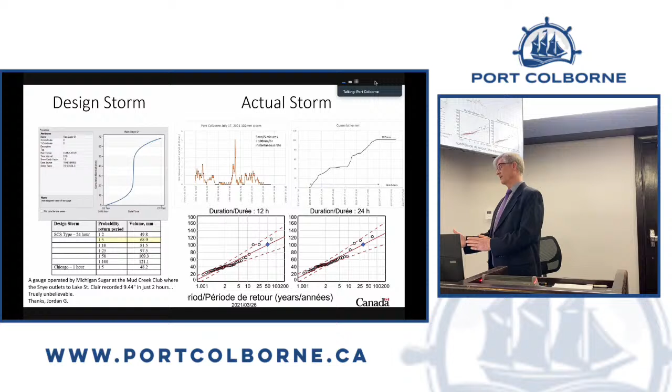The blue diamond on the bottom chart - these two charts help us compare the statistics of past rain events to this rain event. It's somewhere between a 25-year storm and a 50-year storm, just to give some context. The total amount of rain delivered was just over 102 millimeters in about 16 hours.

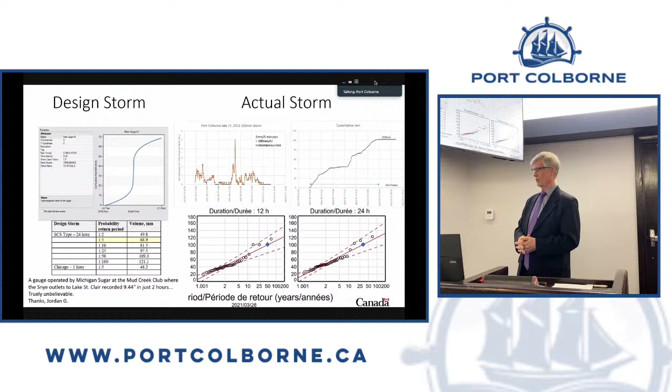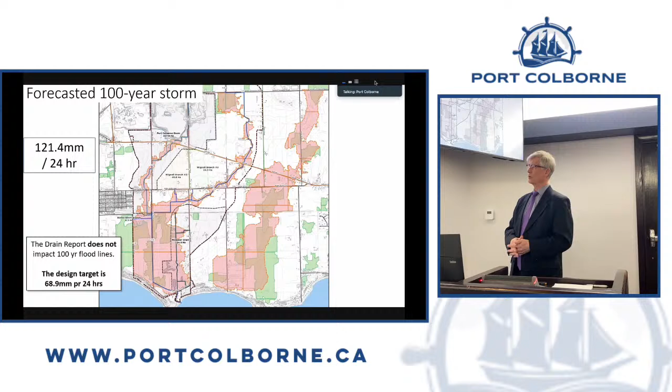But all the rest of those lines at the bottom, my report doesn't change or affect those lines. That stays with the Niagara Peninsula Conservation Authority.

As part of this, there was previous work constructed under Section 124 of the emergency part of the Drainage Act, where as a response to something bad happening in the drain, the city can go in and do works on an emergency basis. That's what was done here: 157 meters of construction using concrete blocks to form a hard embankment on the south side of the Wignell Drain at Snider Road, the south part of Snider Road.

It was requested by the property owner at the abbreviated roll number of 403-800, which is - I'm going to point there - in the middle of that diagram. Thank you, Alana.

However, it was built on somebody else's property, the property to the north, so there's a bit of a conflict there. It's also built on the Snider Road right-of-way, 26.4 meters of it. The challenge is this is past work that was done, but in this report, it's to be billed out to those that are affected.

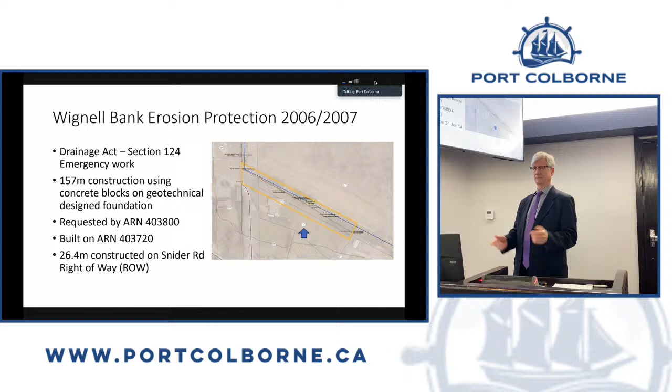Can you go one more? Yeah, there. And one more. Those are the two properties, and one more.

There was a significant amount of effort because everybody knows it's in the bog, so the ground is not very good ground. There was a study by a geotechnical engineering firm on how to create a base that these blocks are constructed on, so there was a significant amount of cost in the construction of this work. As part of this report, that's to be billed out to those affected.

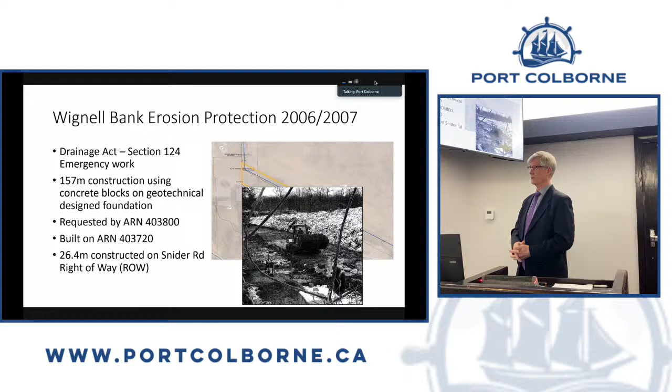Next please. The other work that was done was at the outlet of the Wignell Drain. The land changed owners, and the new owner asked that the access for maintenance at the mouth of the drain be changed. So that was done, and as part of that, it was recognized that under the Drainage Act, we should have a reserve for any right of access to the drain across someone's property. So there is a payment as an allowance for that reserve, and there's a construction cost for the gravel to create the laneway to the very end.

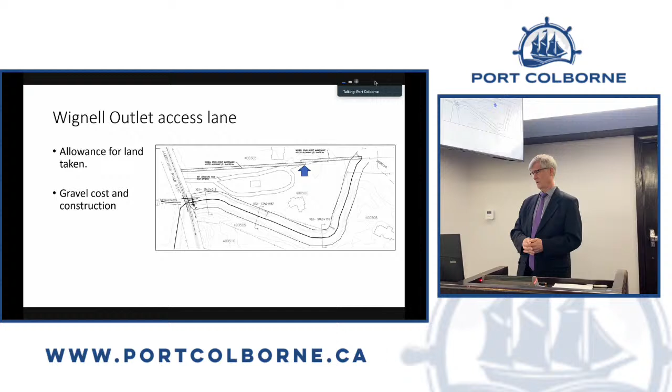So the petition for requests, as Alana's already stated, anyone can make a petition request under the part of the Drainage Act. In this case, we have 3 requests, all from the city, by the road authority to have sufficient outlet. I'll go through and describe those.

So the first one is the Bower drain. The previous drainage superintendent believed it's already a drain, but we couldn't find any evidence that said it was a drain exactly. So we went through this process, which makes it a drain. It makes it a branch drain of the Wignell watershed, called the Bower drain, which is what he thought it was called in the first place, so we're sticking with the same name. This exists; we're really doing this as an exercise so that the city can perform maintenance on it at any point in the future, and it ensures that the road outlet at that corner has a place for the water to cross an outlet.

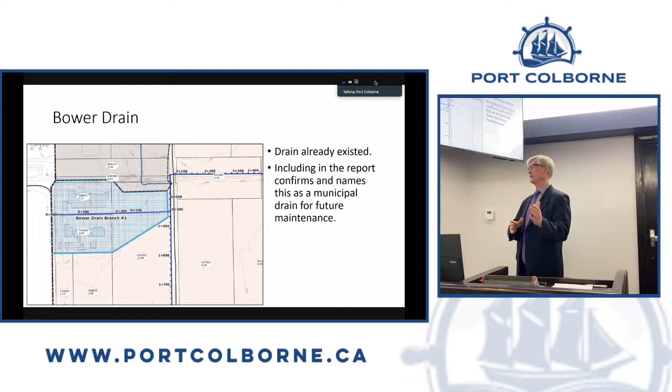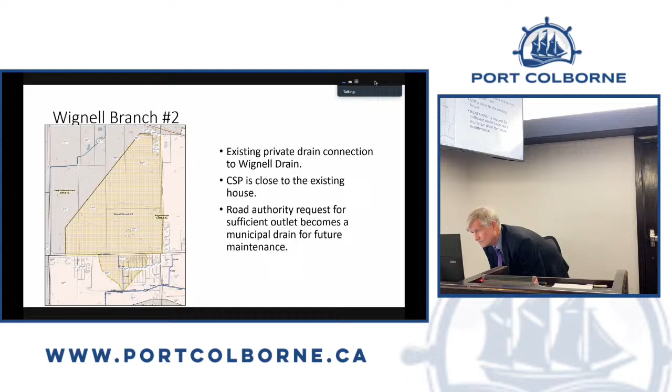The second one we're calling the Wignell branch number 2, which is not as good a name as the Bower drain, but it's what we have. It's again on the basis of the city signing a petition for sufficient outlet. The drain is just the little part that's at the very end connecting to the Wignell drain, but it drains a significant part of the watershed all the way west of Lorraine Road.

Part of this is there's an existing corrugated steel pipe that's very close to the house, and this routes a future path for the drain to go around that property and still provide access for runoff from the roadway. It satisfies the road authority request for sufficient outlet. It's really an investment in the future needs of the roadway requiring drainage.

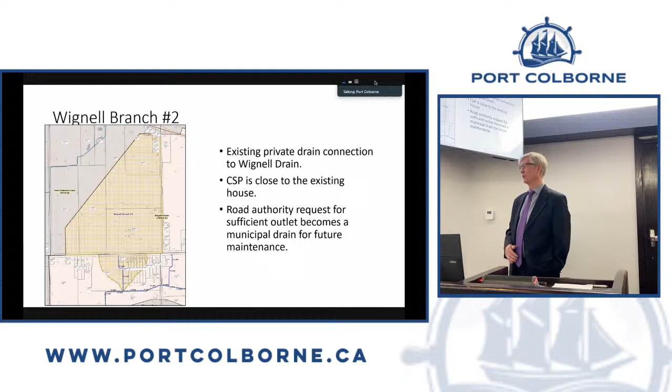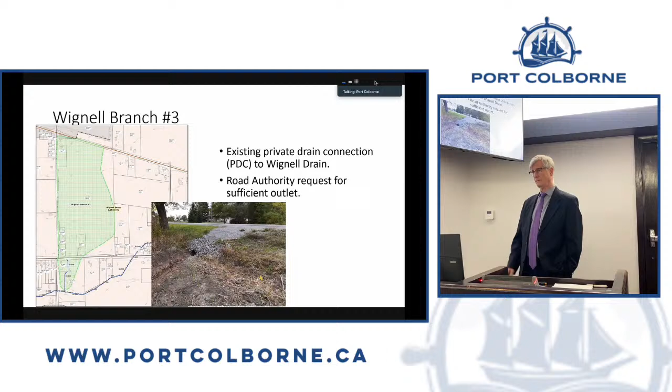The rest of the report, the next part is under section 4, maintenance. A lot of times maintenance will be done in the future and billed out according to the maintenance schedule, but as part of my report, we're doing maintenance on the drain, and that work will be billed out as part of this report. Next, please.

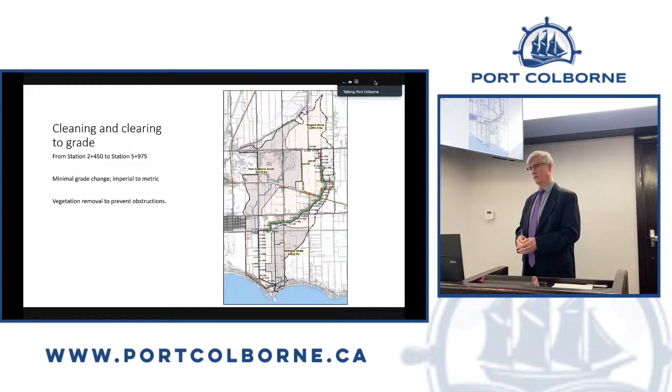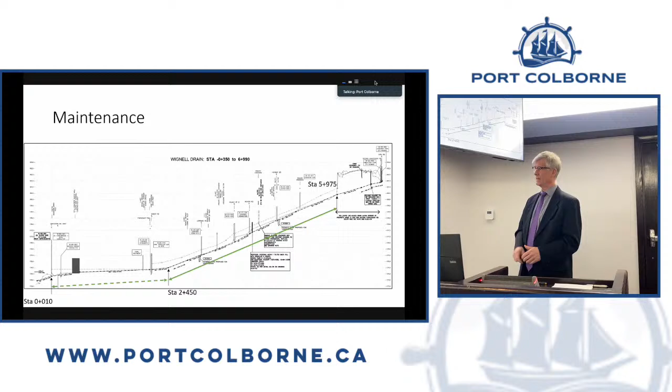The bottom part there in the dotted line, we're just doing spot maintenance. Wherever there's an identified problem, Alana will go in and fix that problem, but we're not prescribing a complete cleaning of the drain. It's spot maintenance only, so we've set a budget for that, but it's spot maintenance.

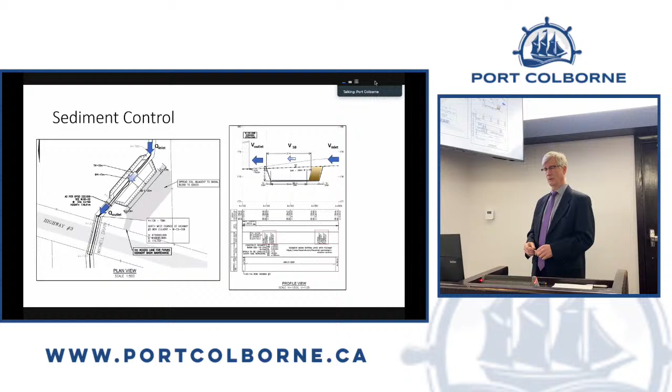The next parts are Section 78 improvements under the Drainage Act. They are things we're proposing to make it work better.

All of the costs for this are assigned to the quarry. Alana and I participated in the quarry's application for development, and we had some influence on the plans so that we have maintenance access there that's on the quarry, not on the neighbors. It's really the quarry that's carrying the bucket for these changes, and it ensures that all the farms to the north still maintain their sufficient outlet through the drain.

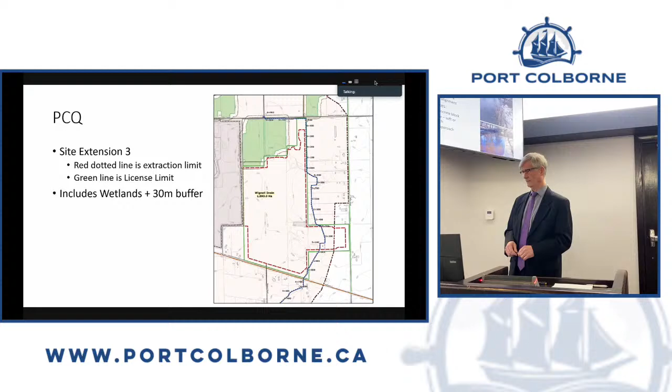The other part we're calling the Bank Restoration Improvement Program, and this is an alternative to the concrete blocks. We can continue to construct concrete blocks, but in engineering terms we're trying to do things in a more natural way, imitating nature instead of just replacing with concrete blocks. That's what this is, bank restoration using natural materials, supposed to be a softer approach than the concrete blocks. It recognizes that there will be flooding in this area, exceeding the banks, and that's part of the natural cycle.

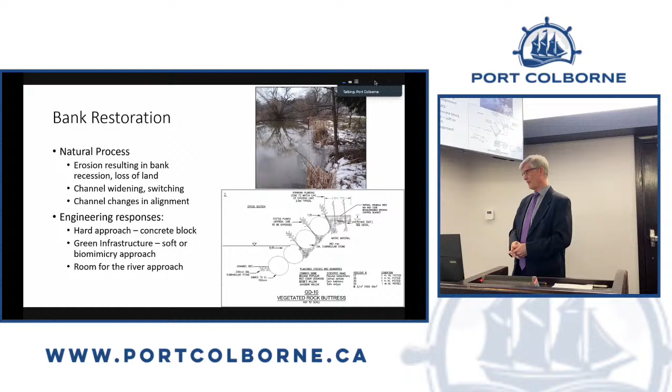It's a softer approach using vegetation. This is an example from Huron County from last summer. It's hard to see, but if you point to the little sprigs in front, this is called live stakes. Instead of putting a potted shrub in place, these stakes are cut, they get root growth on them, and you take a metal rod, make a hole in the ground, stick the stake in there, and step on it. Some of them take, and as you can see here, some of them don't. It's a planting approach.

Dogwood is a typical variety, that's the red one we're seeing here. It's the roots of that shrub that holds the bank in place. In this case, up in Huron County, this is constructed with very specific gravel in the middle because it's brown trout nesting habitat.

It's meant to be a natural embankment, so there isn't grass cutting intended along the edge of it, which is the idea of an alternative to the concrete block. With the concrete block, you can cut grass right up to it. It's a choice. And we don't have brown trout to worry about, so we don't need the specific kind of gravel in the middle of the stream.

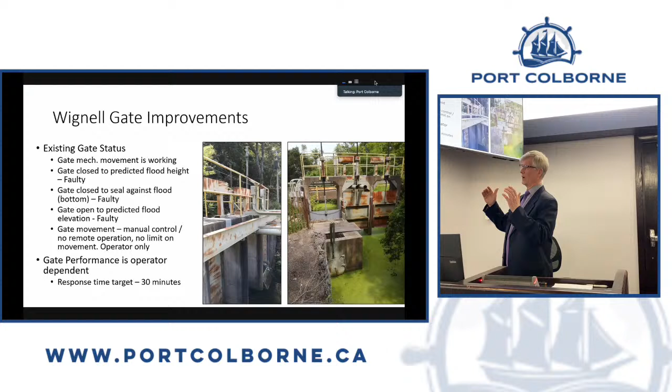The response time using an actuator is much improved over the electric motors that are there. The two pipes in the middle were put in for in-stream submersible pumps at some point - this predates me by a long time, but my understanding is they never worked particularly well, and right now they prevent the gate from opening all the way. So those pipes get removed so we can open the gate as high as possible.

Question: when you put those sensors in, will you do a capability study to make sure it's working over a reasonable amount of time? Yes, as part of that there's a process in the specifications we call site acceptance testing, and that is an expected outcome that we'll do.

With the lake being there, we're doing the best we can with what we think could happen, but there are some cases with wintertime and icing conditions that are difficult to exactly predict. The sensors we've picked aren't affected by moisture or other things. They're not floats, they don't touch the water to take a measurement, it's a reflection.

I can explain that with some drawings later if you'd like to see that.

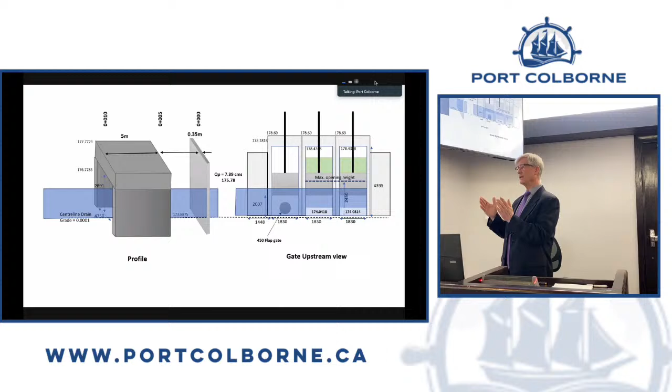The remaining two gates, when fully open, just barely let enough water get out to the lake. It's a significant restriction - in order for it to work, the velocity of the water has to dramatically increase. It's not the best way that it works.

So at some point in the future, these gates and the bridge will probably get replaced at the same time - it's not now. We're doing this work to make it work better now, and we're using equipment that could still be used in the future gate that gets constructed. But that's a future occurrence that'll happen.

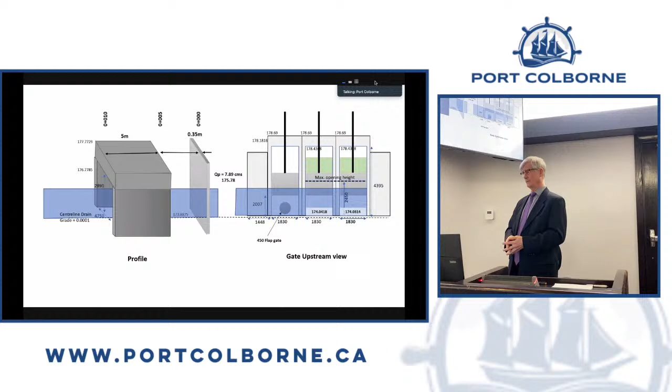Go ahead, and click one more please. So this is the one improvement - it's the extension of the bottom so that it seals and doesn't let water run backwards even when it's closed.

Next one please, this is the other one. Next one - this is our proposed design, when everything's closed we can seal to 176.5. The predicted height of the flood is coming in bigger than that for the 1 in 100 year case.

But that's a long-odds risk. It happened in the not-too-distant past when the lake was at its peak and there was a big storm, so it has happened in recent memory, but according to the Niagara Peninsula Conservation Authority, NPCA, it's a low risk event. With this closed, most storms will not overtop it.

Next please - the other one is we want to be able to open everything to 175.2. That's fully open, and that just barely lets rainwater from the watershed get out through the channels that are there. North of here, under the bridge, it's adequate capacity. South of here, the channel that goes to the lake through the dunes is also adequate capacity. It's just in this one place that it's a greater flow restriction than in engineering we would like.

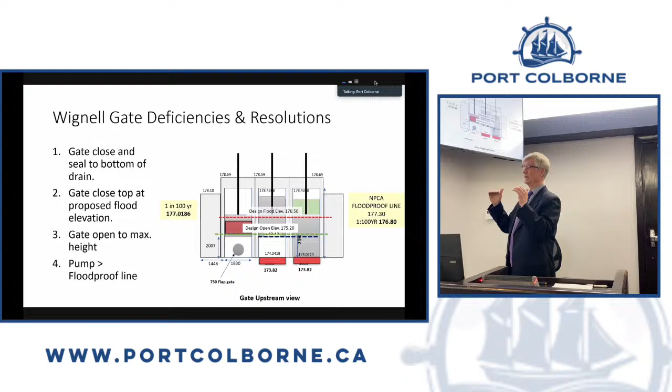Next please, oh one last one. Go ahead - on top of here, where the original pump used to be, that's now identified by the NPCA as a flood-proof line that's higher than that pump mount. So if the pump was to go back there, it would have to be raised above that level, above the flood-proof line, in order for it to go back in place. We can't put it back the way it used to be.

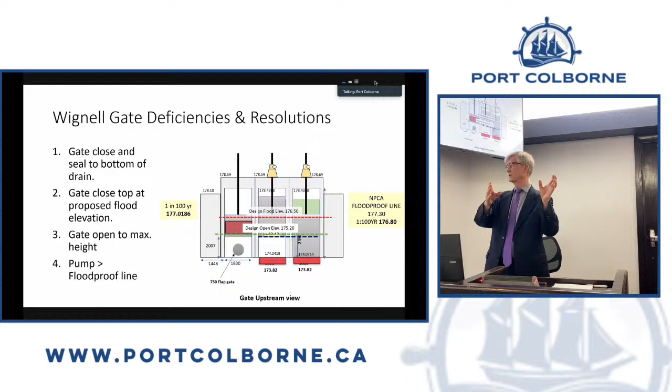Go ahead please - this is what happens as we switch the electrical motors out for new actuators on top. The threaded rod stems remain in place, and there's a computer control case that goes off to the side that the sensors hook up to. Next please.

Next please - now this is when the storm is going backwards. The little blue blip at the bottom is the predicted maximum flood, 176.8 is the elevation, so it would be a foot over the top of our closed gates. So it's the extreme condition, but that's the extent of the area that would be affected. Next please.

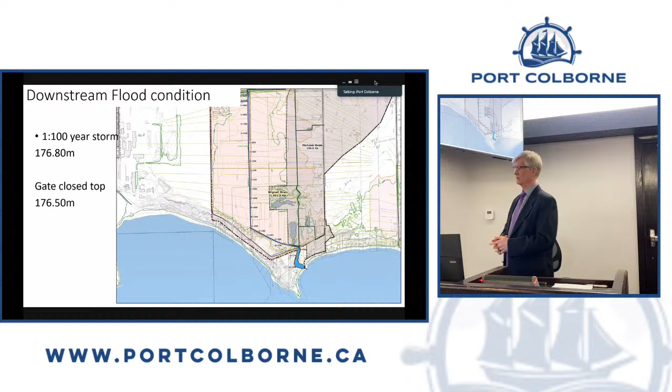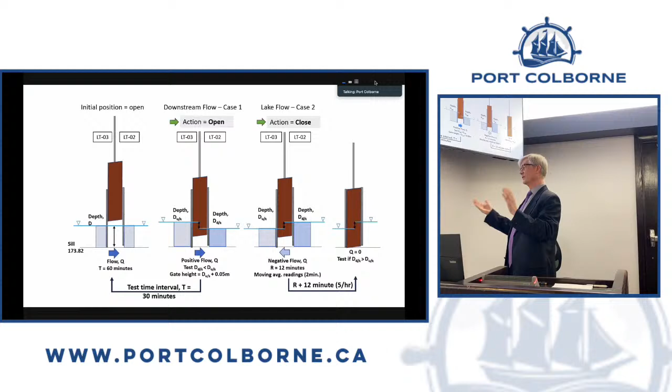This is the basics of the control of the gates, and it's pretty simple. When it's higher on one side of the gate, the lake's trying to go backwards, so it closes fully. When it's closed, and on the north side, north of the road, it's higher than the lake, it opens.

We're expecting that the gates are optimized so that we get the best out of this without a pump. The main reason for this is that the original market gardens, there were 5 farms that paid for the pump, and they don't exist anymore. They're all owned by a company, and those lands are abandoned, not being farmed. So as a drainage engineer, I don't see the benefit in putting a pump back at close to $250,000 for farms that aren't needing pumping anymore.

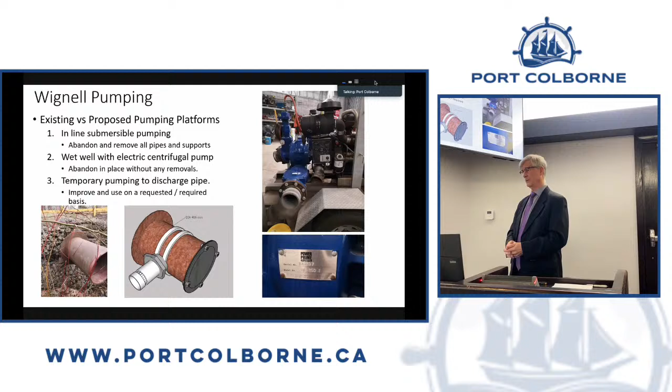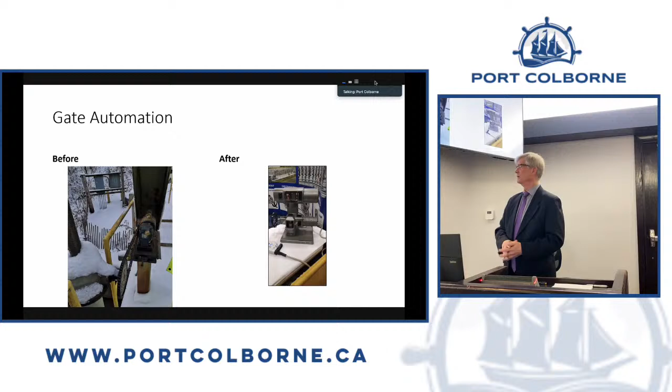Next, please. This is what it looks like now. Next, please. This is what the actuator looks like that will go on in its place. It's not off to one side, it gets mounted on top of the stand that's there. Next, please.

So our estimated cost of construction is close to $1 million in round terms. The previously constructed works is $250,000 in round terms, and about $400,000 in engineering and administration costs. There's allowances of about $18,000. Wherever we've had to move the drain or do something with it and we take property, we pay an allowance. Unless in the quarry's expansion case, the drain used to run there and now it's just following a different path, we're doing a 1-for-1 switch in land there. There's no payment made for allowance. So the total cost is $1.6 million.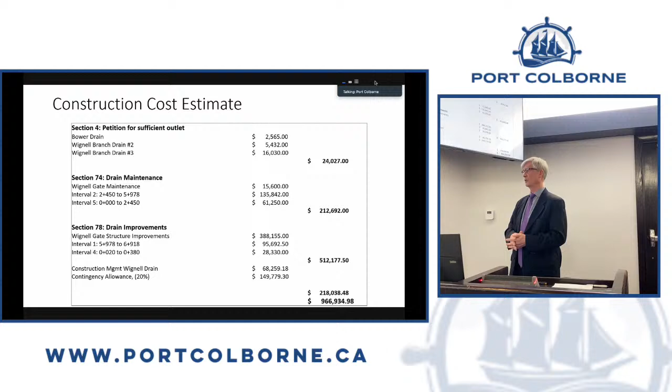I'm going to go through this very quickly. Wherever we take lands, it's $10,000 an acre. If I look at the land reports now, that's when I started this 6 years ago. Agricultural land's probably a bit more than that now, but I've stuck to this $10,000 an acre for allowances. We don't have damages under Section 30, and we don't have land for work zones under Section 29 here, except where we did it on the outlet, and that is actually paid as land taken. Next, please.

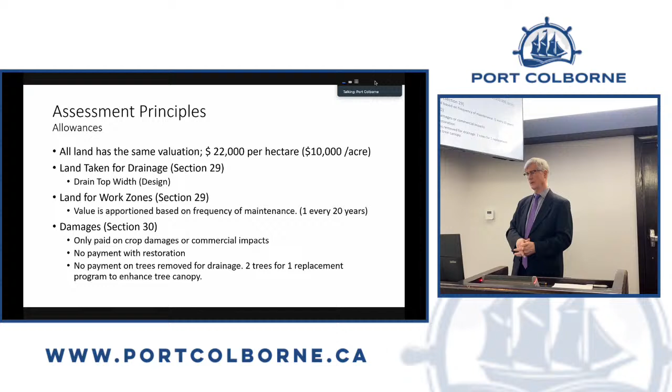This one is Section 31 where private drains are incorporated, and we do have this in 2 cases on the Wignell where there's an existing channel that was there. These are the branch drains. There's already a channel there. We're taking it over, and so it's presumed that that owner of land created that channel, and we pay them for what was done previously. Next, please.

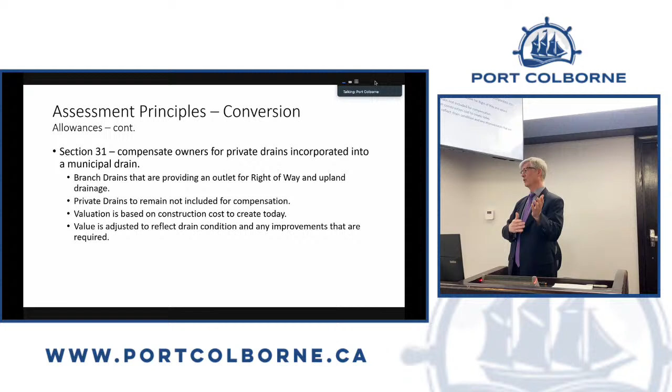I don't have any land improvements in here, so there's no assessments for land improvements because the drain has existed almost forever, and there's nothing really changing that makes people grow bigger, better soybeans. Everything is pretty much on the basis of outlet liability and outlet benefit, which I'll talk about in a minute. There are some special benefits - 50% of culvert costs are assigned to a couple, and the special benefit for the quarry, that's their piece, is assigned as a special benefit. And then there's a Section 26 where the roads are assigned, so the culvert replacement on Kalali Street is 100% the city's cost as a Section 26 assessment.

Next, please. The Section 23 assessment - this slide is directly from the Port Colborne drain. So it's been discussed at the tribunal.

Everybody pays for how much water runs off their land and occupies a part of the drain, and they pay on the basis of that peak flowing off theirs. If you have a property that's all pavement, you would be expecting to pay more than someone who has all moss and sponge, for example.

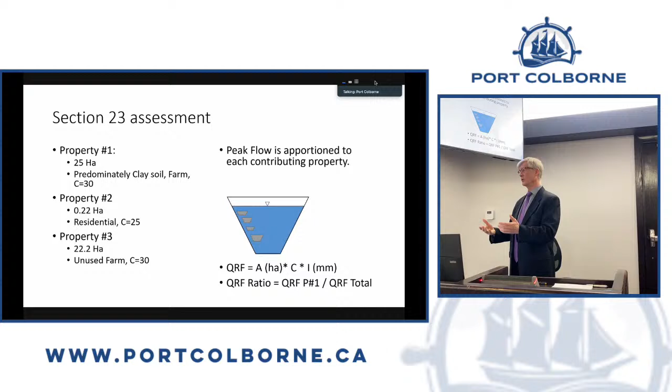Next, please. As the summary, the past work from 2007 is an assessment I've included.

The Petition 4 request by Road Authority creates 3 new branch drains: the Bower, Wignell Branch number 2 and Wignell Branch number 3. Section 74 is mostly maintenance through the middle of the drain. Section 78 has a bank restoration improvement program proposed for one property using natural methods. The drain realignment is paid for by the quarry, and there are 2 sediment basins constructed in this.

There's an outlet access reserve and gravel lane that was already done, which is included in the report. There's a proposed outlet gate improvement that does not put the original pump that was there back. This report is prepared in compliance with the Drainage Act of Ontario.

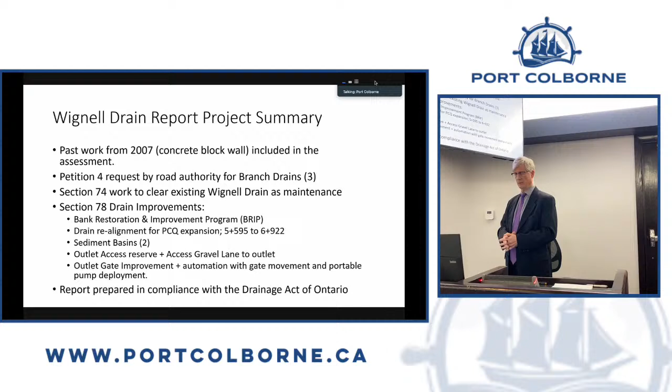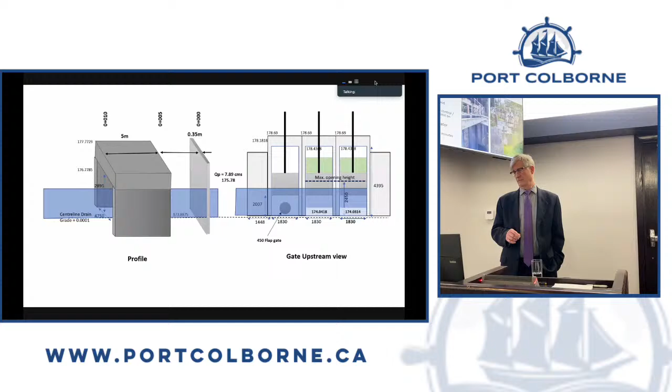Constantly eroding a natural curve, and it's a sharp left. This concrete block is really meant to reinforce that and keep that in place. So is that to the benefit of the whole drain or just a particular section? That's where I was going.

The owners that are south of there, that's none of their doing. That's the natural act of the drain trying to get to the outlet. So it's their property that's being protected, which they do get a benefit from, but it's at the cause of the drain turning a corner.

And so in my report, I have said that where there's something occurring in the drain, nothing that the owners have done on either side, a portion of the cost related to the benefit is paid by the owner, but the majority of it, in this case because it's so close to the outlet, all the rest of the drain pays as a liability because it's their water that's trying to make that corner turn. In this case, that ratio is 12% to the 3 benefiting landowners of the total cost, and 88% to the rest of the watershed.

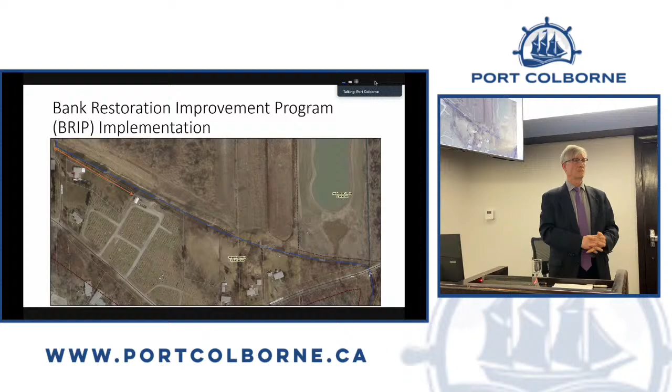So that, thank you, Diana. Stay there, Paul, or yep.